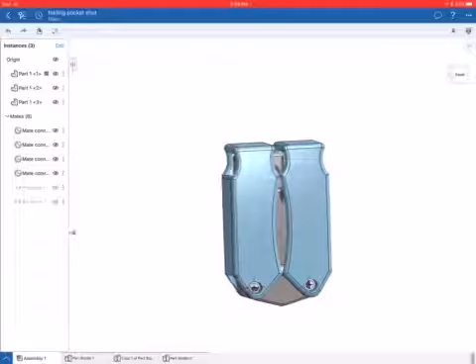So I finished this design. Now this is version 1, obviously, and I do plan on probably making adjustments in the near future.

This is an assembly in Onshape, which allows me to manipulate it with different relationships. This is how each of the two arms move. The hole you see is where we're going to put a 5mm, an M5 screw. Let me unselect this so we can see it swiveled around.

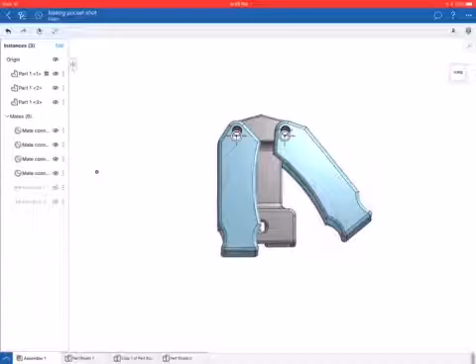I put a little bit of a gap so I might be able to fit a washer or two in there on either side, potentially. And then when we open it all the way up, let's turn this upside down here. I take this, open it all the way up.

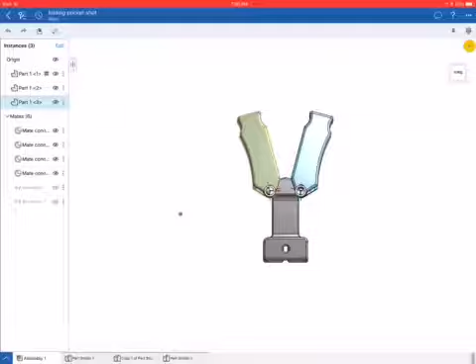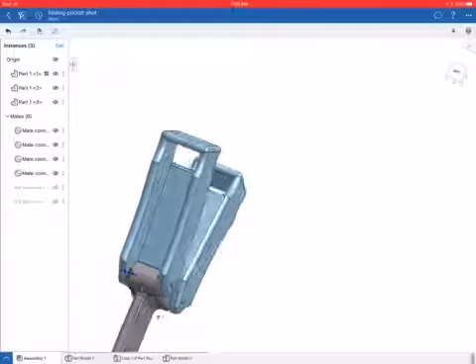It stops where it resists. And then if we select this one, lift this one up, all of a sudden we have a very nice little slingshot design. I actually made those holes on the top portion on purpose, thinking that there might be band attachment methods that I'm not all that familiar with that might be able to use that hole a little easier. But I have a feeling this is going to be very strong.

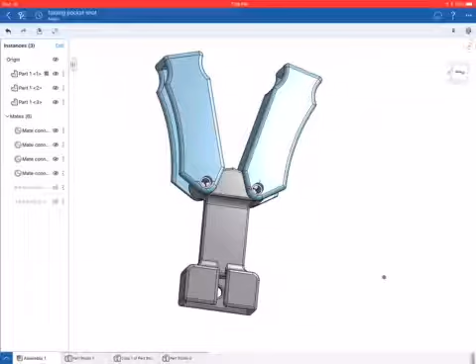And the funny thing is, this folds up to be only about 6 inches long when it's folded up, and that's pretty impressive. In some ways, I think 6 inches is actually too long. After I built this, I might find that I can actually shrink this down just a smidgen more. I'd like to make it slightly smaller than that, maybe just over 5.5 inches.

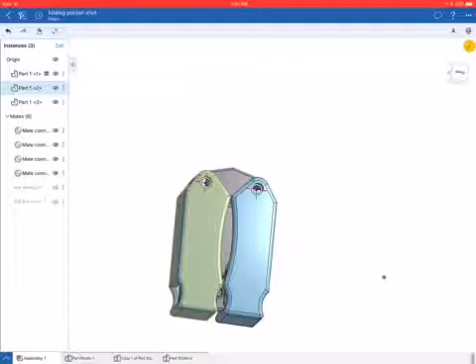So I'm not going to shrink it too much, but because of the way Onshape works, it's very, very easy for me to manipulate the dimensions of these objects without actually having to redo anything. So I'm really excited. I'll hopefully be able to print this this weekend. That would be really cool.

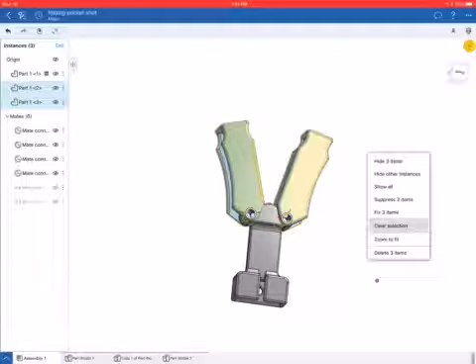If this is something you're interested in, I'm hoping to have a video up showing that it actually works. That would be really cool. We'll just have to see at that point whether we can make it work.

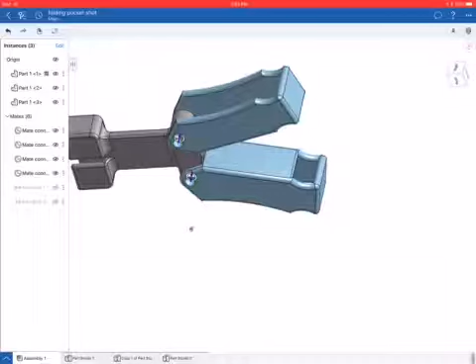One thing that I do think is concerning is this area right by where the threading goes through. I am worried it's a little thin, only because I'm going to end up printing this piece along this flat edge here, which means all the layers are going to go parallel to that. It means that hole could cause splitting at that part, and that's the one area of failure we could see.

So there's a couple ways I can alleviate that. One is with materials. I'm going to do this in PLA, which is one of the weakest materials, but when I finally come up with the proper design, I'll put it into PETG, which is a much stronger plastic, and then if the adhesion of the layers becomes an issue, I can actually print this in nylon.

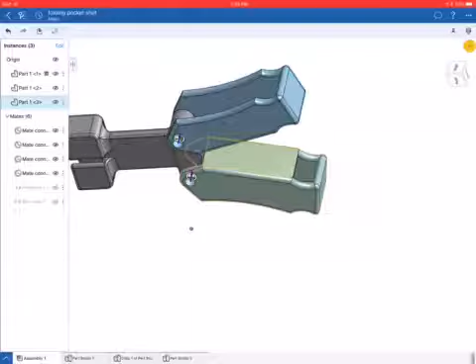Once I do that, the layer adhesion of nylon is so insanely good. It's essentially like printing one solid part with no separation of layers, and at that point this thing will be practically indestructible for all intents and purposes, using it the way it's supposed to be. Obviously you can break just about anything, but I think this will work great. We'll just have to see.

Anyway, that's the design for this folding slingshot. There's a couple other models, but I really like this one, just for the sake of the fact that you can actually store the band inside the component, so it's nice and organized inside your pocket. So you can pull the whole thing out, set it up really easy, and then go ahead and shoot it, and hopefully not take that much time either.

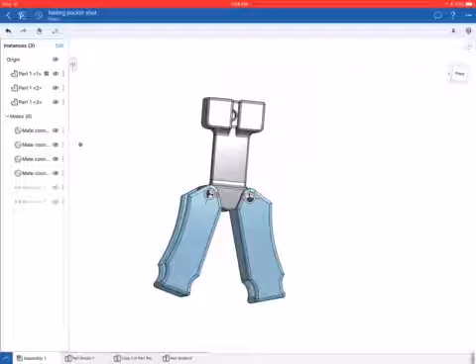So earbuds, you're going on a trip, wrap it up like earbuds, wrap it up, put it in your pocket, take it anywhere, easy peasy. And if you're worried about somebody confiscating it, thinking it's a slingshot, just put some earbuds in there, put the band somewhere else, and then you're still good to go.